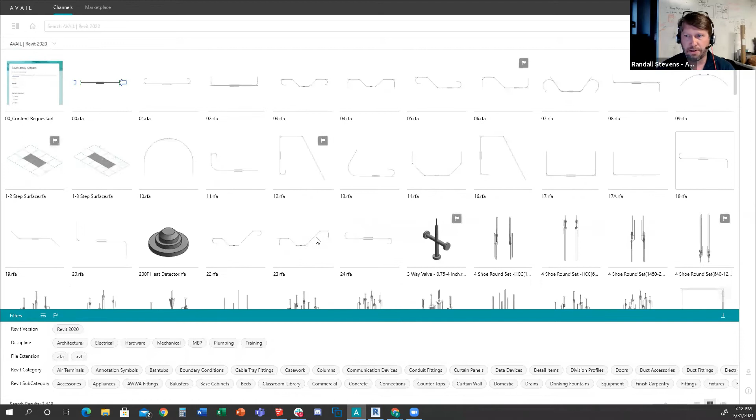So I'm going to show you the variety of content. I'll start with some Revit content here, so you can see this is a channel full of standard Revit standards library. If I look at the bottom left, there's almost 3,500 pieces of content.

The first thing I'll show you is if I select one of these, right click and say open the location, it's probably going to pop on my other screen over here. What you'll see is it just opened up Windows File Explorer and took me to where that piece of content is. You can see this lives on the network down in this folder hierarchy that I call file folder hell, that we all live in trying to find this kind of information.

So the first thing is, Avail, we would use the term flatten - it flattens out the availability of this. But you'll also notice down here at the bottom what we call the filters panel. You can open this filters panel, and Avail automatically has picked up a lot of metadata and information, displaying them in the form of what we call tags.

So searching, you'll notice there's a search bar across the top, making it very easy to type in what you're looking for. You can also use these tags in any combination. You'll notice this data is actually structured data, so you'll get things like Revit category, and I can see all the different Revit categories. If I choose casework, you'll see that Avail is searching and filtering down, showing me things that have been tagged with the word casework.

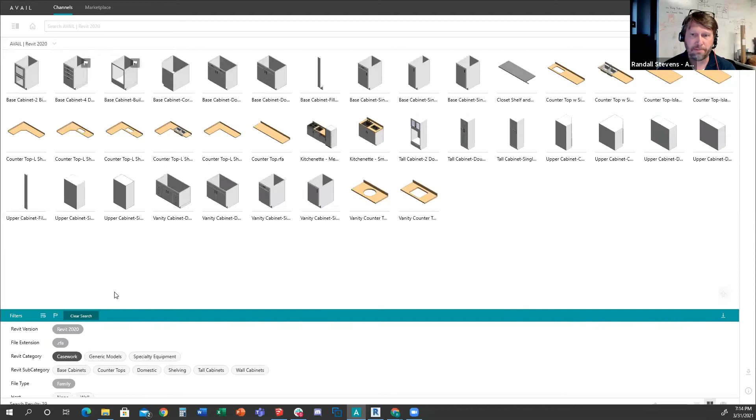I'm just holding down my control key and using my scroll wheel to change the scale of those thumbnails, just to show you. If I go over here to the right and open up what we call the preview panel, you'll see that you're able to get nice high resolution previews of things like this as well.

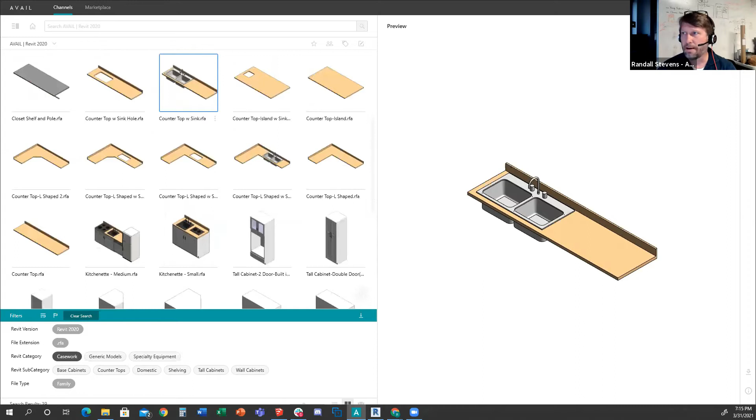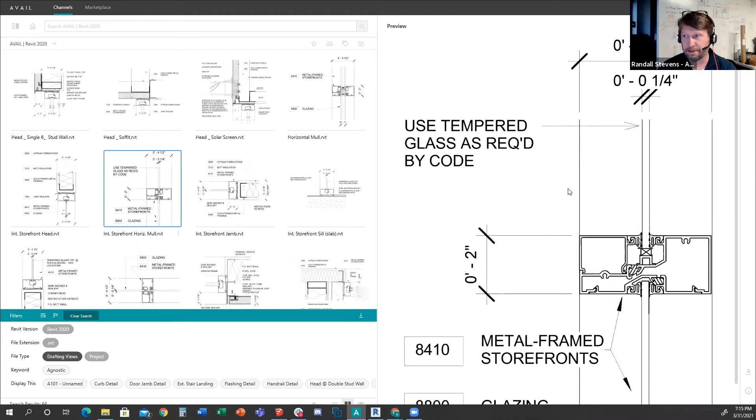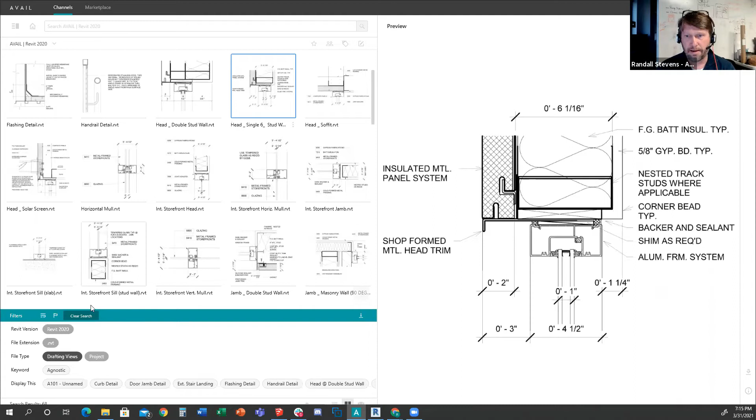But I'm not limited to things like families when talking about Revit content. We also support data that has to be stored in RVT files, things like drafting views and other content you may be tasked with organizing and using in your projects. The ability to display high enough resolution that you can see if it's the detail you want before committing to bringing it into your project is just one example of our heavy focus on the visual nature of this, making sure that when content gets into Avail, you can see it, which is very helpful in finding what you're looking for.

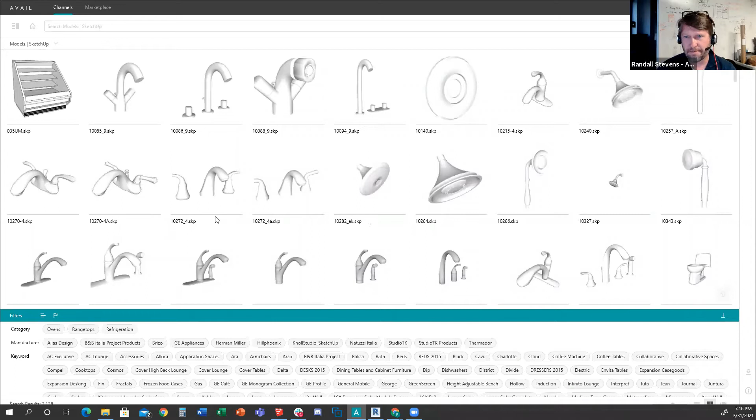Before I take a deeper dive and show you some specialized things we do with Revit, let me show you more breadth of the kinds of content you can organize here. I've got channels for other application-specific content, and I tend to use SketchUp as a simple example. You can see I've got a channel with a couple thousand pieces of SketchUp content, and again, this is all searchable with a simple text search or using filters to filter it down.

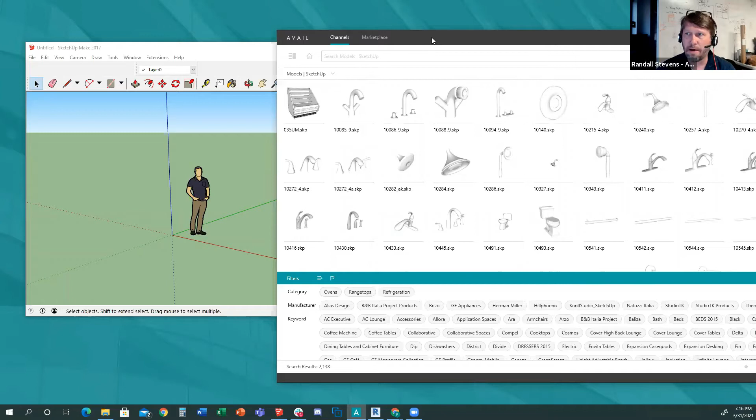What I'm going to do is bring up the SketchUp application and show you that getting content from Avail into an application is often just as easy as finding it, dragging, and dropping it. The reason this works, when I say Avail is content agnostic, is that it's a file type, SKP file extension, that the host application, SketchUp in this case, knows what to do with.

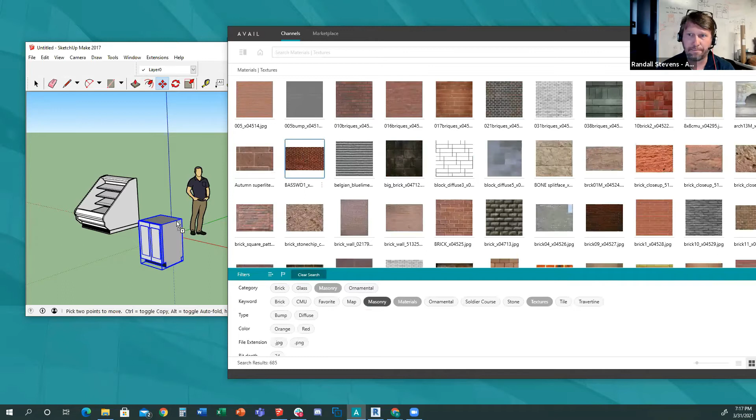If I go back to the home screen and look for my textures channel, I can find a channel full of textures, probably JPEGs and PNG files, and look for a masonry texture to quickly narrow down this content. If I want to bring that brick texture into SketchUp, you can see as I drag it over, that's not because Avail had to do anything special, it's just because SketchUp knows what to do with these file types.

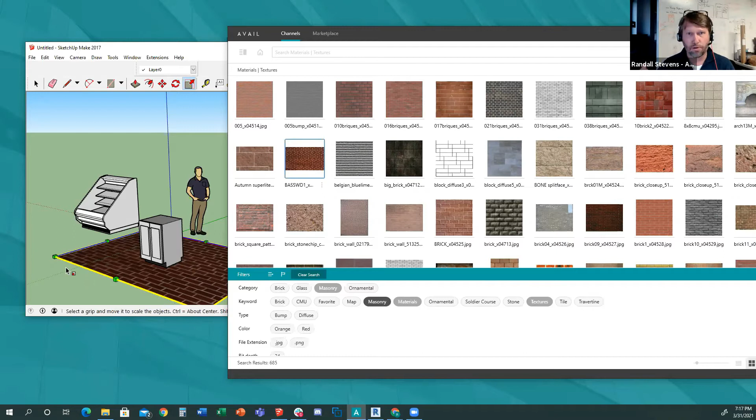So the general test is, if you can drag and drop it into the application from Windows File Explorer, you can also drag and drop it from Avail, which makes it very flexible. I could just as easily have photographs in here and be dragging those into PowerPoint or a Microsoft Word document, just as easily as these technical applications. I like to start with that to get you thinking more broadly about the variety of content that can be managed inside this application.

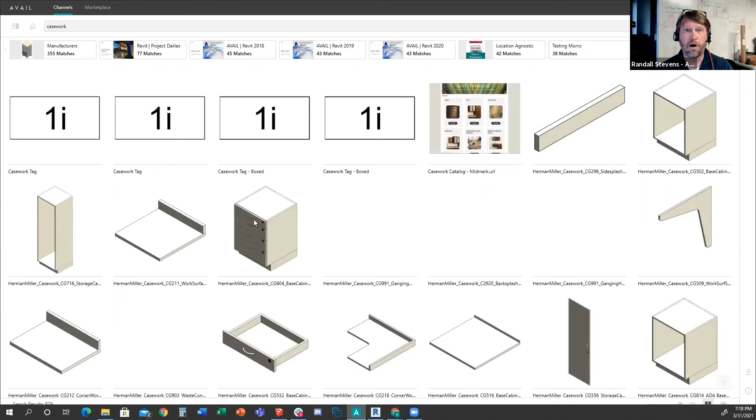If I go back to the home screen, I'll show you that you can also perform your searches from this home screen, and it's actually going to search across all of this content. For instance, if I search for casework, rather than being in that single channel, I can look across all of my information and content and get results back.

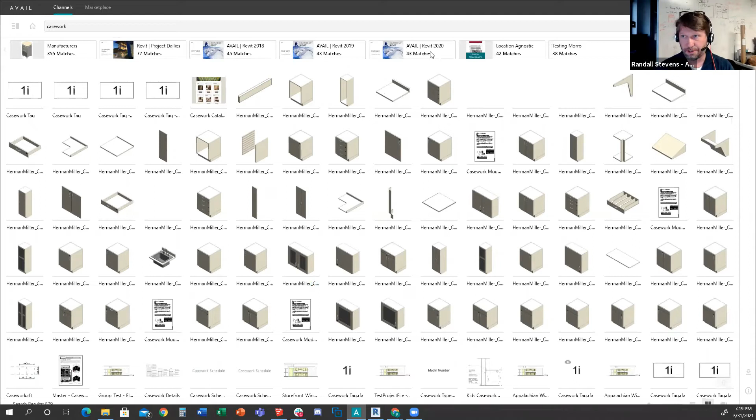What you'll notice in the Avail interface across the top is, maybe more importantly than bringing back content, which can be noisy depending on what you're searching for, we bring back the context where we found that. In this case, I can scroll across and see the different channels where I found this information. So if I knew I was looking for Revit 2020 casework, I can filter that with one click, or I may find out there's information in one of these other channels.

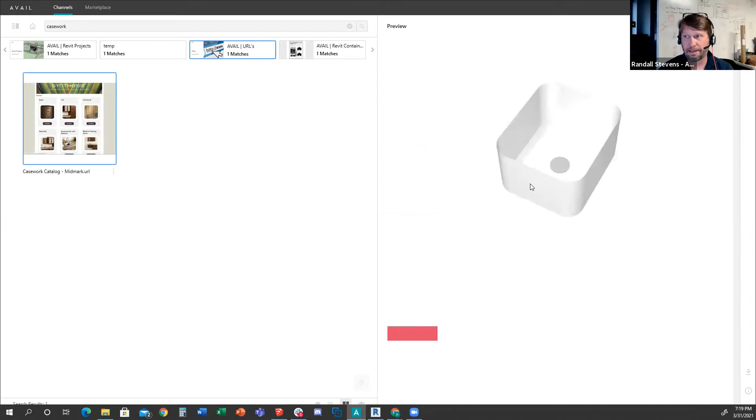Here's some URLs, a great example of the flexibility of what you can index and view. This is actually a URL to a manufacturer's website that's been organized in Avail. If I open the preview panel and touch the link to the URL, you'll see that Avail is actually rendering that website right inside the application, which makes it very flexible.

We've got a lot of customers. I've got a couple of channels here with lots of URLs I can show you. This feature was actually added from watching what our customers were doing with Avail, as they were starting to organize, especially interiors groups or people who have a lot of external references to information.

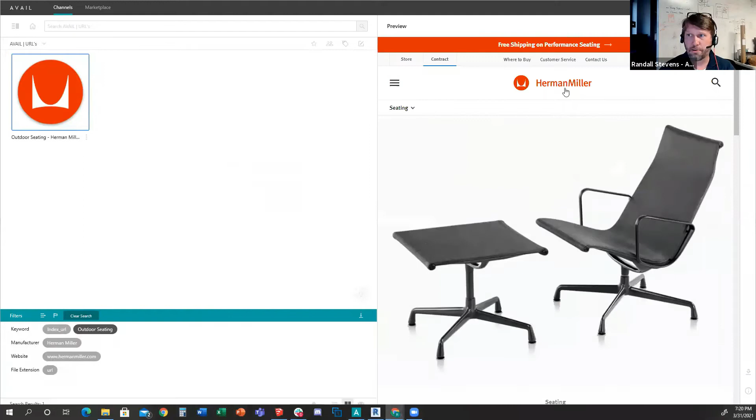You can see that you can tag these things, filter them down, and open up the preview panel with direct links. That can be an external website, an intranet site, or anywhere you've got information stored. If I double click on this, it's going to launch my web browser. I'll just show you—it launches Chrome and takes me to that website. So we have these built-in preview and viewing capabilities.

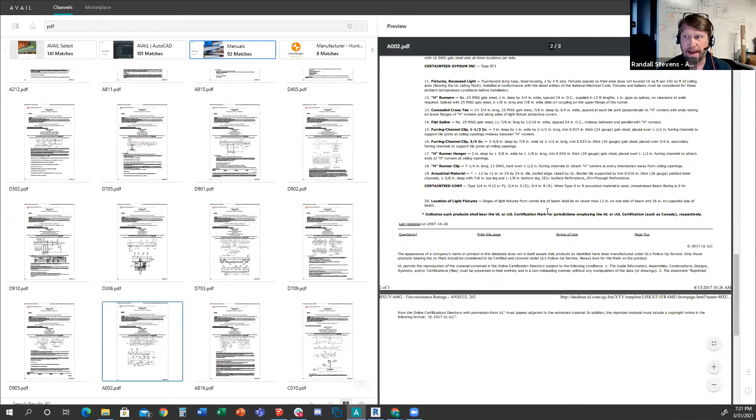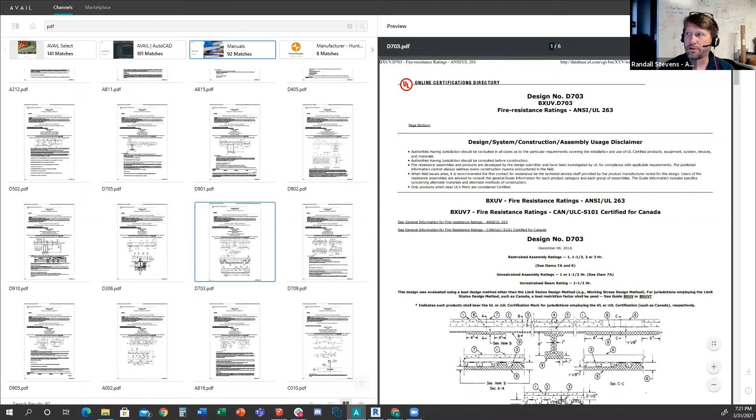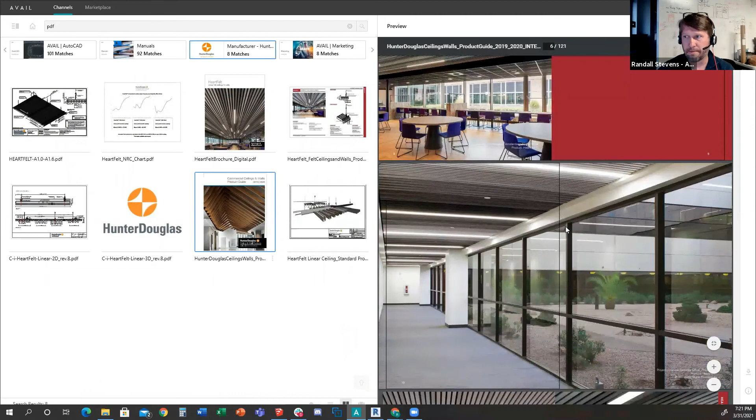Another useful document type is PDF documents. Here you can see lots of PDFs across different channels of information. If I select one and open the preview panel, you can preview it and quickly see if that's the document you need. If you're using Bluebeam as your primary PDF software, we're not trying to replace what Bluebeam does—we're trying to help you see if this is the information you need before you launch it into Bluebeam. If I had Bluebeam installed and double clicked that PDF, it would launch right into it, so it's very flexible. This makes it quick and easy to see if manufacturer's info and data is what you're looking for, and decide whether to pull information out or open it in another application.

So that's showing you just some of the breadth.

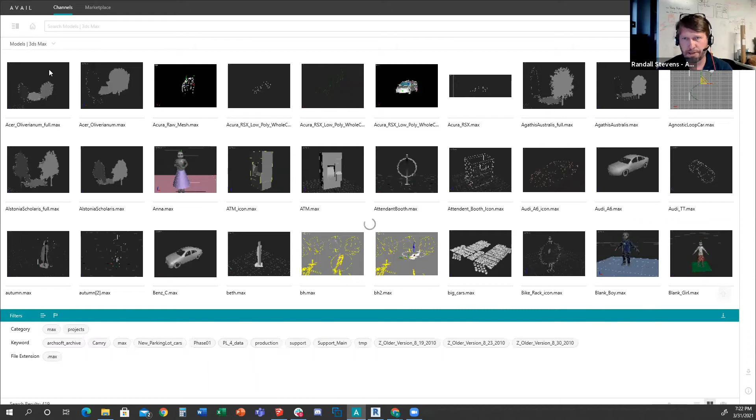Visualization assets—outside of Revit and DWG AutoCAD files—are probably the number 2 use case. You can see here I have 3ds Max files being managed in a channel, again with the ability to search and get back to find that information.

The other use case that's become quite popular is the ability to organize and manage photos. It doesn't even have to just be marketing photos—it could be construction photos or site photos that are project related. The ability to get those into this interface, and the preview panel comes in very handy to see those in high enough resolution.

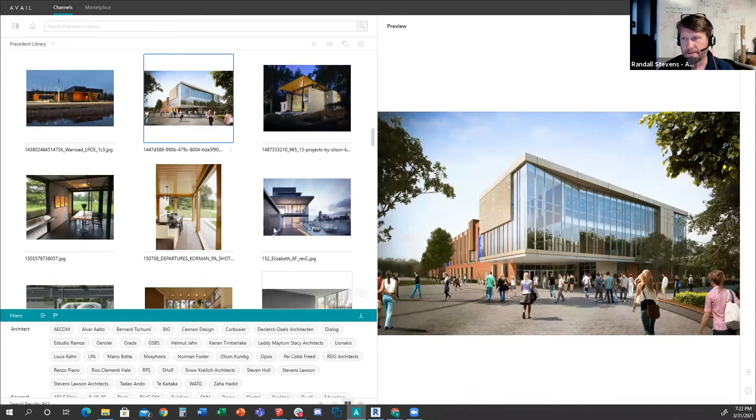We also introduced in this last release what we call a carousel viewer. If I close that, I can go into the carousel viewer, which lets me mouse over and thumb through, page through photos. So a lot of focus on the visuals.

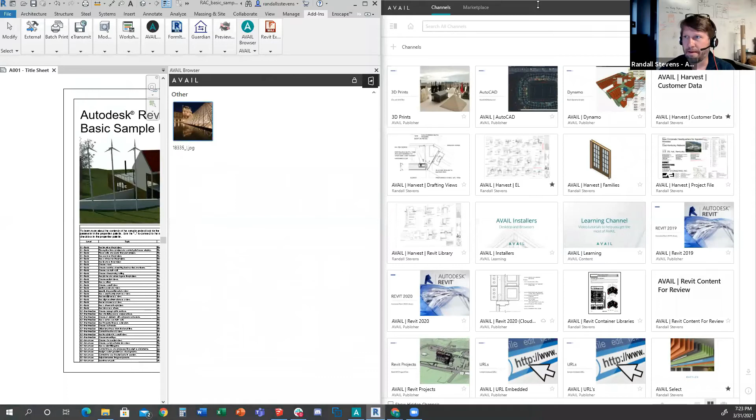Let me take a little bit deeper dive into Revit. What I'm going to do is dock the Avail desktop. Typically our customers would have 2 monitors sitting on their desk when using software like this. I'm going to put these side by side so you can understand the interaction between the pieces of software and how they interact.

I've just opened up Revit and the sample project file here. What you're seeing is what we call the Avail Browser, which is a plug-in browser for Revit. This browser lets us, in the context of your Revit project, see and pull information. I'm going to narrow this down a little bit to give me more room.

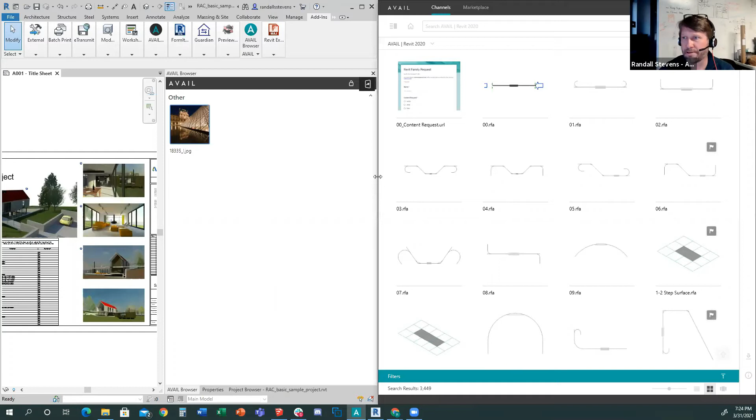This lets us bring in very specialized Revit content. I'm going to give you a couple of examples here. Let's just go to a 3D view to start.

So here I am in my desktop, and I'm going to show you that you actually can work without the desktop open. You can actually just work directly inside the browser if you want, but I'll use this as an example to start showing you how this can work.

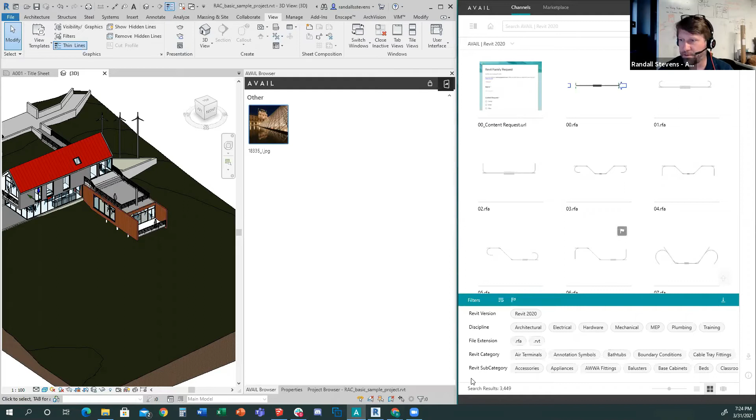What I'm going to do is search for that casework again, see our casework samples. I'll start with just some simple families and show you how the interaction works.

If I choose that family here in the desktop, what you're going to see in the active Revit project session is the Avail browser bring forward all of this secondary information, in this case all of the types available for that. I can either select a single type and load it into my project.

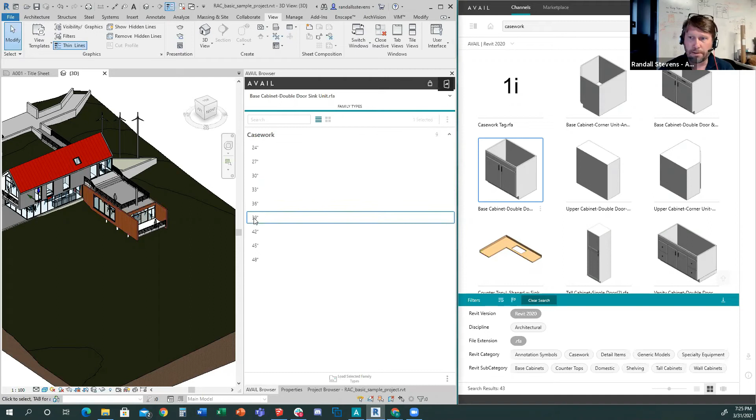We actually support multi-select, so I could load multiple types into the project. Or more often than not, your workflow can be to just drag and drop that over into the model, and it's going to bring that single type in and put me into placement mode. You'll notice there's a little check mark beside that single type that loaded.

And if I go over here to the project browser and go down to the families where that piece of casework lives, what you're going to see is that single type came in.

One of the things we've seen with our customers, especially using this for their Revit projects, is that customers are always fighting data bloat inside of their projects. Traditionally the mode of operation has been to try to stuff everything you might need for a project into a template and start the project up.

But what we've been seeing over the last few years is a move towards thinning those templates out, usually to just the graphic standards, and then using Avail to keep all of the information outside of the project until it's specifically needed. You can think of that as a very additive process to your project, as opposed to bringing in lots of data that you then are fighting.

We see it all the time, that as the project grows and the amount of data in it grows, you're fighting that project data bloat. So it's actually kind of antithetical to bulk load lots of this information into the project if I can just selectively bring it in as needed, keeping the data in your Revit project file thinned out.

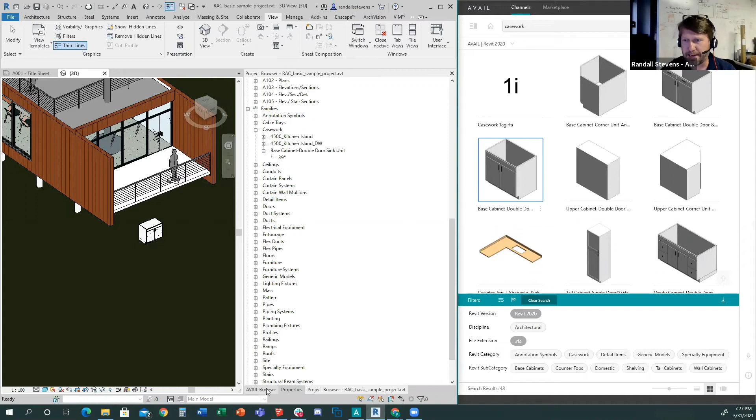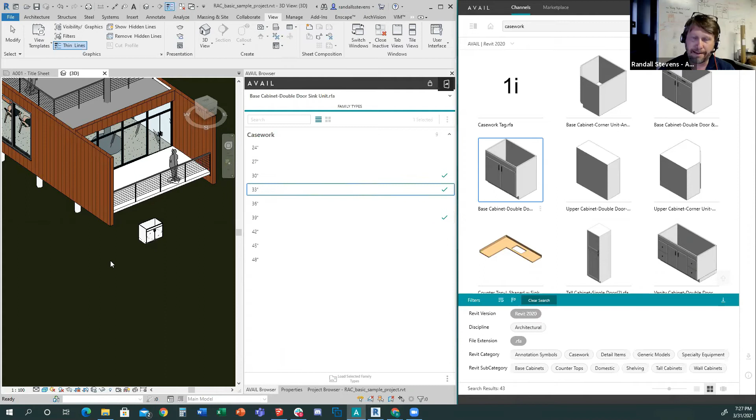So that's obviously a simple example. If I did want to load just a couple of other types in, I could just click, select those, and they're going to get loaded into the project without putting me in placement mode. Just a very quick workflow of finding and getting that information into your project.

What gets most people excited are things that aren't families, and I'm going to show you the kind of traditional support for this, and then a brand new feature we just introduced last week. But here you can see I've got RVT files.

There's a lot of your Revit information that aren't families - things like drafting views, system families, views, sheets, schedules. All of that kind of information ultimately has to be stored in an RVT file, and there's complexity to that.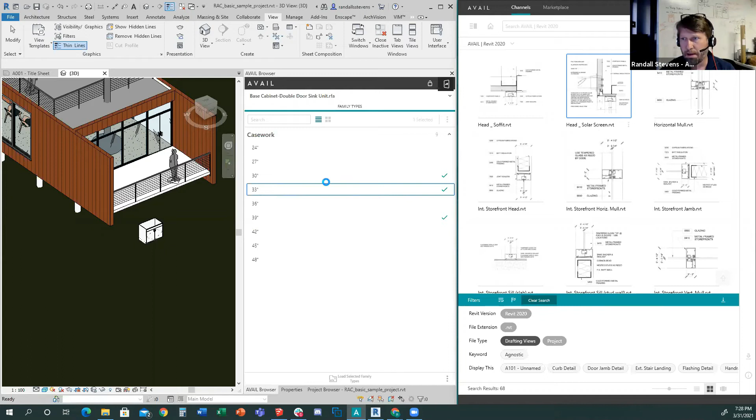But what I'm going to show you is that here I have these details in a library that are all searchable. If I select one of those, what you're going to see in the Avail browser is that this is an external RVT - so without opening that project, we're behind the scenes actually exposing that information.

You can see here that I get the preview, but I can also right click and do a full vector-based preview - so once I'm in the context of Revit, I can do that. I still have not brought this data into the active Revit project. So what I'm going to do is just go over here and create a new sheet to work on.

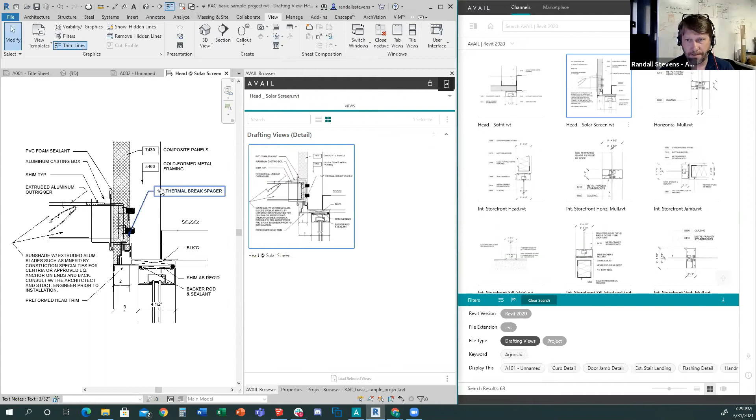Now I can actually just drag and drop that drafting view directly onto a sheet, if I want to. This is basically replacing a multi-step process that everybody's used over the years, which is a Revit project standards transfer from project A to project B. We've really simplified these interfaces, so you can see it loads it and puts me into placement mode all in one step.

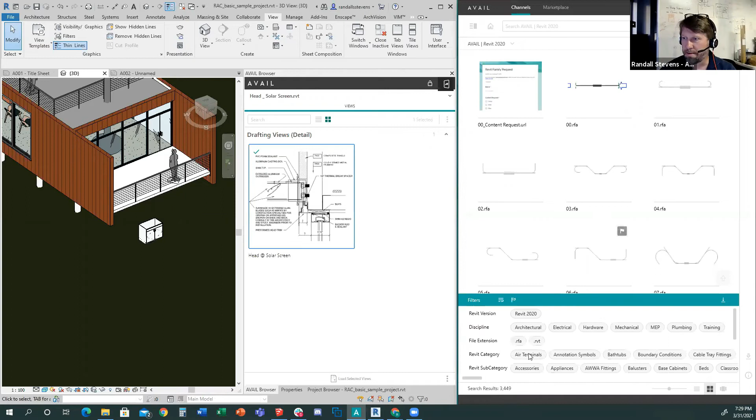Let me go back to my 3D view and show you the other kinds of content types that you're forced to manage this way, like system families, which have to be stored in an RVT file. So what you're going to see here is I have some system families in a single RVT file, what we call container libraries.

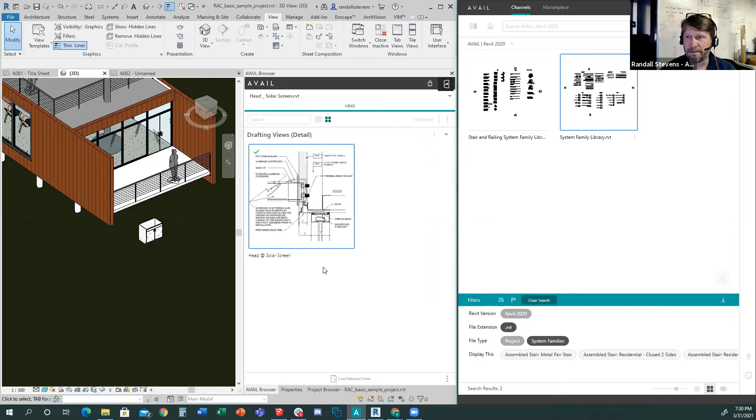So what you're going to see is that Avail is opening that data up. You can see here that I have all of these system families, and they're actually searchable in here. So if I knew there was like a veneer, well, let's find maybe brick. I'm looking for a wall type, find the wall type, and again I can just drag and drop and start modeling instantly from this interface.

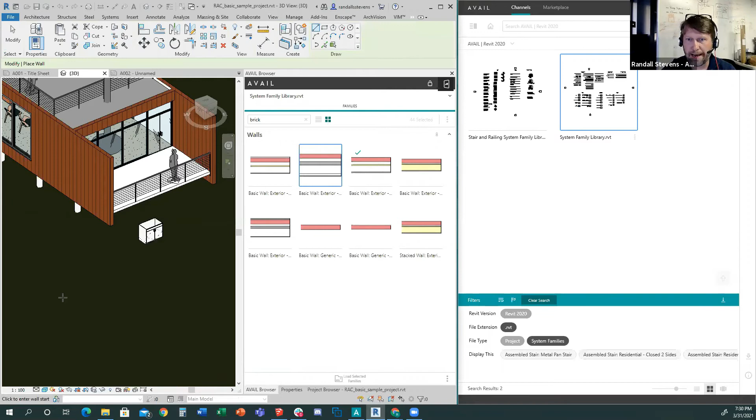So this has been the default kind of support that we've had for how to manage this, and it's obviously been a huge help to all of our customers who were fighting with how to store this information and make it findable and usable by their end users. What I'm going to show you is actually a brand new feature.

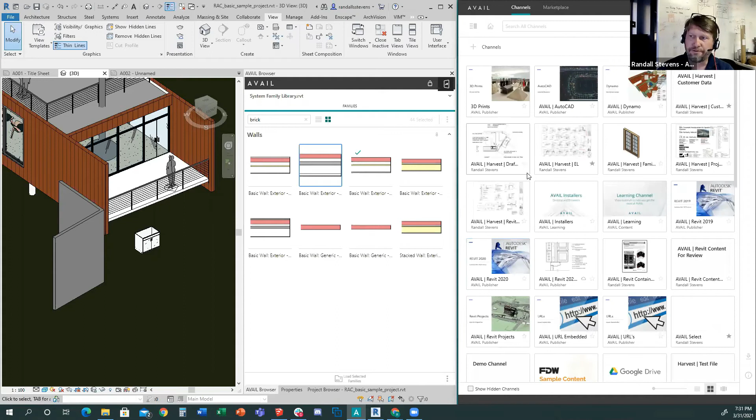I'm going to go out to a different channel. We released a new feature we call Harvest. So I'm going to go to a different channel here that's just got some drafting views in it. Let me go full screen with the desktop for a second. These are all details that are actually being stored in a single RVT container file behind the scenes. What this allows you to do is it completely frees you up in the interface, because these are taggable, searchable, findable.

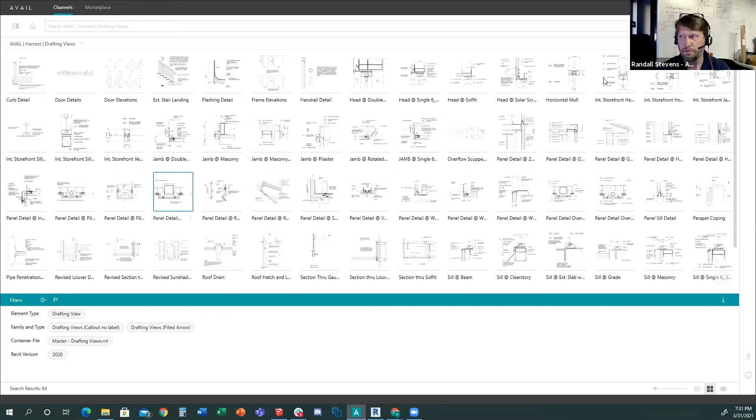If I open up my preview panel, you'll see that we get high resolution previews. All of this was automatically generated by our Harvest tool, pre-processing on all of these files. But this makes all of this searchable, findable, and then ultimately, in the context of Revit, immediately available to be brought into my project.

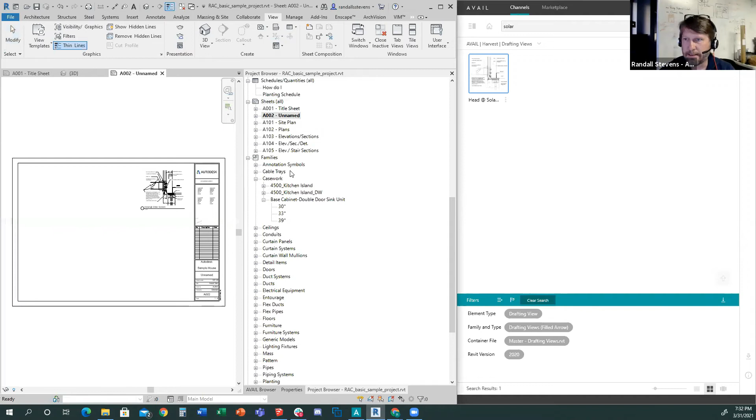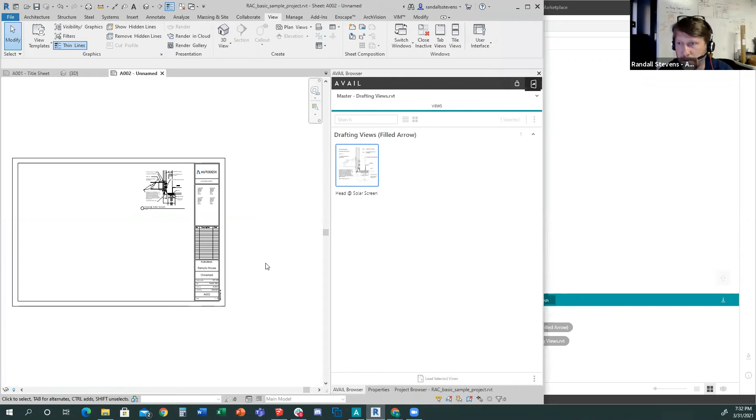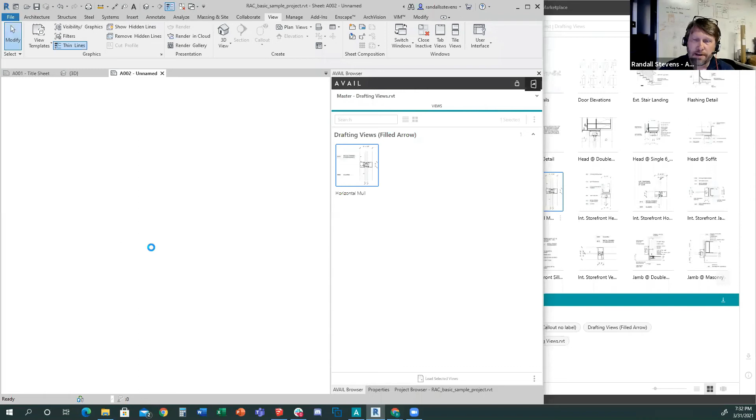So if I go back to that sheet that I had created and now open the browser, you'll see that I can actually drag and drop this directly onto a sheet in this project. Come back here—oh, I think I was in placement mode. Let me get that loaded. So this is, there we go. Oh, I think I'd loaded the same object, that was my problem. Let's get a different one—there we go, I was trying to load the same detail.

So it makes it that easy. What I'm going to show you is that this has actually even simplified this further. If I close my browser, even inside of Revit, I can actually just drag and drop these directly from the desktop application over into Revit, directly onto a sheet.

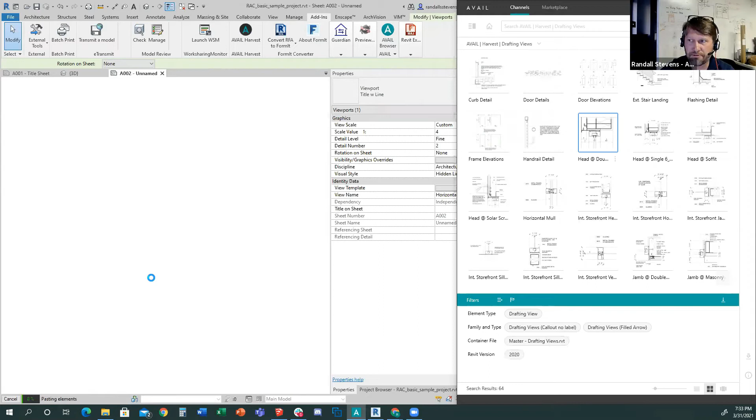So we think this is really going to simplify what it means for the end users. Not only for the BIM managers and the people responsible for managing the content, because you can manage all of this in a single container file, but it's really helpful for the end users because it makes it very easy to search, and they don't have that complexity of having to worry about whether it's inside an RVT file or a family file, whether they can drag and drop it, or what the steps are to get this into the project.

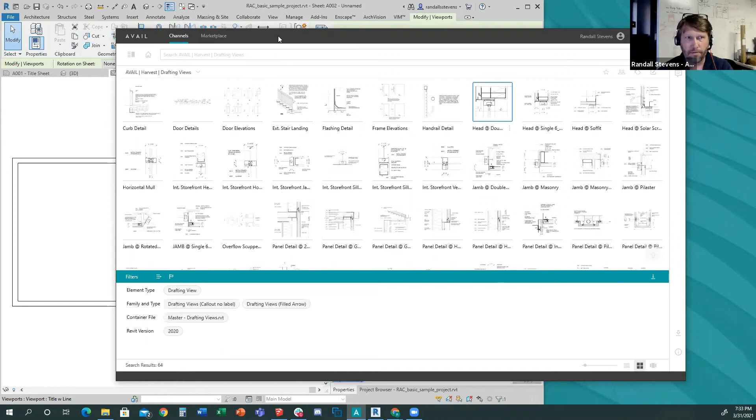So if you take a step back from our philosophy of what we've been trying to do, this is another example of taking location out of the equation. The end user shouldn't have to worry where that content is. They should just be worried about: can I find it in the library? Do I have access to it? And if I do, can I get it into the project?

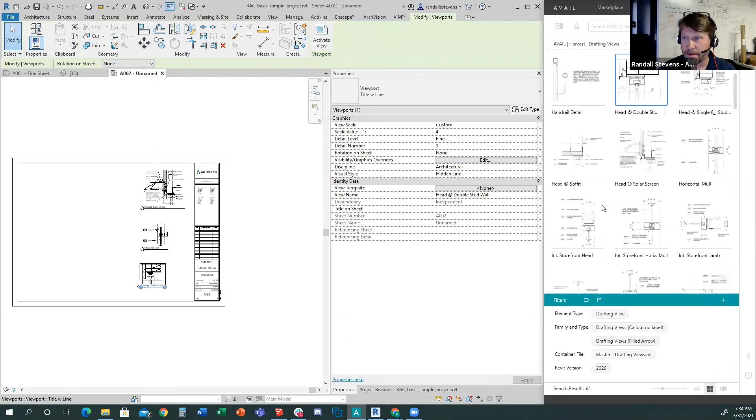Let me show you real quickly that this will work standalone, and then I'll open this up for questions. Watch what happens if I close this desktop application. I'll go full screen now inside of Revit, but this browser now goes into what we call standalone mode.

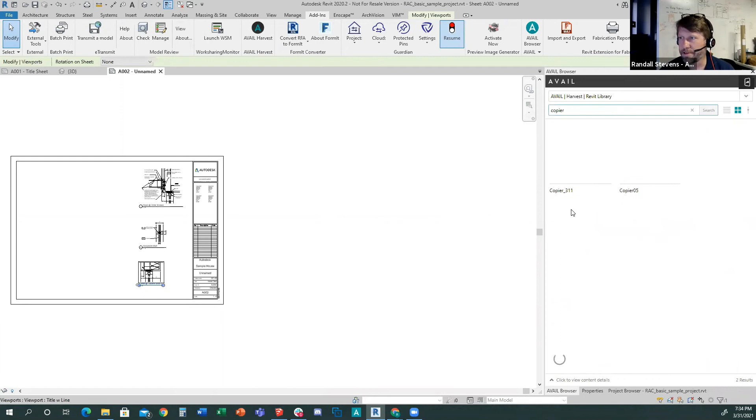I still have the ability to see all of those channels that I had access to information in. This is all still searchable. Let's see what I've got in here. I'll just look for copier. So there's copiers that I have access to. If I'm in my project and working, I can just drag and drop this directly into my model, and it will display if there are any types available for me to choose from.

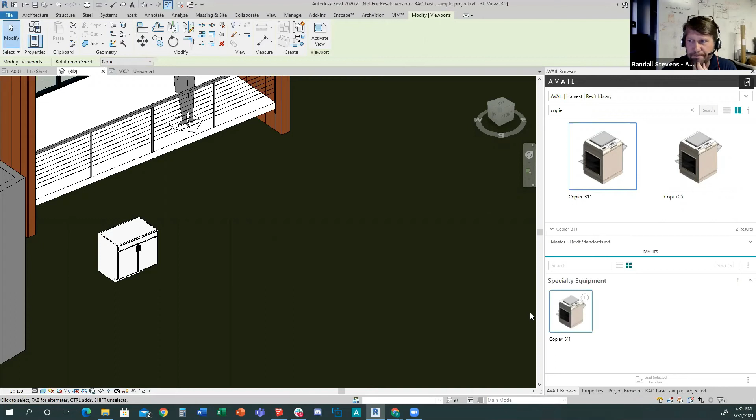Let's see what questions have come in while I'm doing that. Feel free to type in if you've got a question. Looks like the first question was, is it possible to negate the filter tag, say if you want to find miscellaneous content by excluding the content that is tagged? That's a good question, we're asked that actually quite often.

Not currently. It makes for a complicated UI and user experience. There probably are some ways we could do it so it wouldn't be confusing, but the real challenge becomes Boolean searches. The mathematics and the way you do Boolean searches, this and that, or this or that, get very complicated. They're so complicated that even very bright people get confused when you finally put it in front of them. So it's one of the reasons we've stuck to what we call a narrowing search strategy: start your journey of what you're looking for, and then we keep narrowing and asking more questions or providing more data to continue narrowing that out, as opposed to trying to do complicated Boolean operations.

That being said, I think there probably are some ways, maybe just for managers or more sophisticated users, to do inversions of the selection sets and those types of things. But that's something we'll continue to look at. Good question though, Warren.

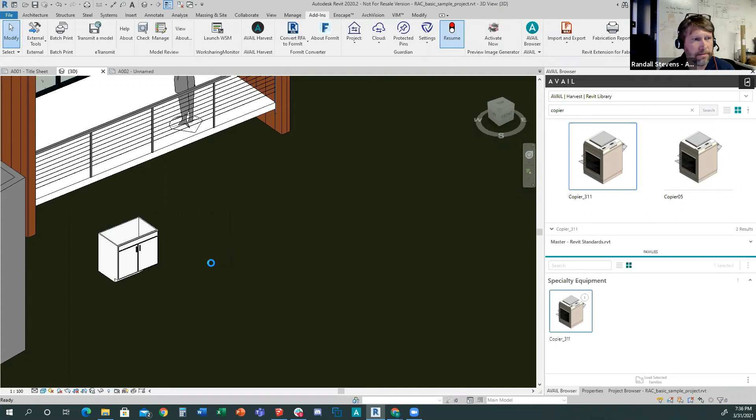Any other questions? We're happy to open that up. If somebody wanted to turn their audio on, we can unmute you as well. Warren asked another question about whether you can add tags, which brings up a couple of other points.

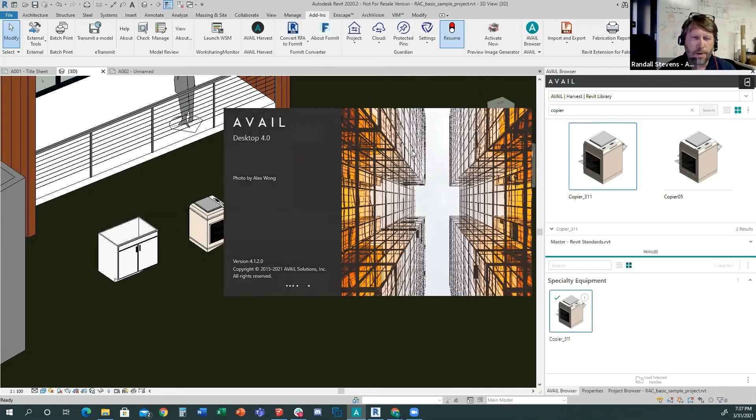Yes, the answer is you can always manually add tags. For Revit we have what we call the Revit tag generator. Actually most of the information you saw in the context of Revit was parameter data coming out of the Revit files themselves and auto-populating. We also pick up metadata off of the file system, so folders and folder names get brought in as information.

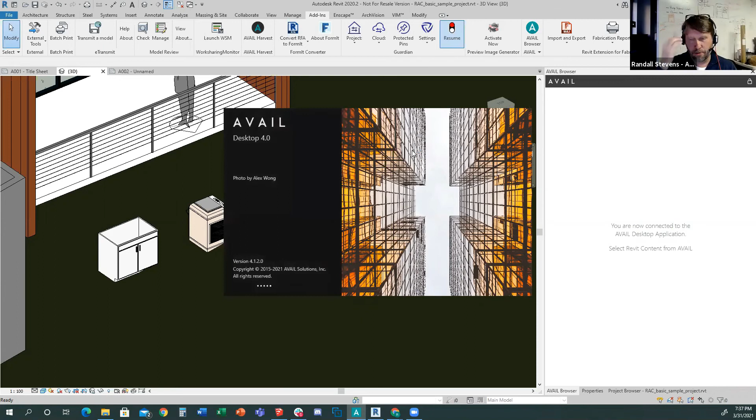As soon as I get the desktop open back here, I'll show you, you can also manually add tags to add more information. We actually have a new feature in testing right now that will be released in the coming weeks: the ability to import and export from Excel and Google Sheets. So you can take large libraries of this information, spit it out into an Excel or Google sheet, do some tag management, and then shove it right back into the system. Lots of flexibility on that front.

Let me go full screen here and show you. If I went into one of these channels and wanted to manually add a tag, I'll just select it, right click, say I'm going to add a tag, and add my name to that. It's that easy. You save the changes, and as soon as that's finished, if I type in Randall, it's now searchable by that. You can see I've demoed that on several pieces. So yes, you can manually add tags.

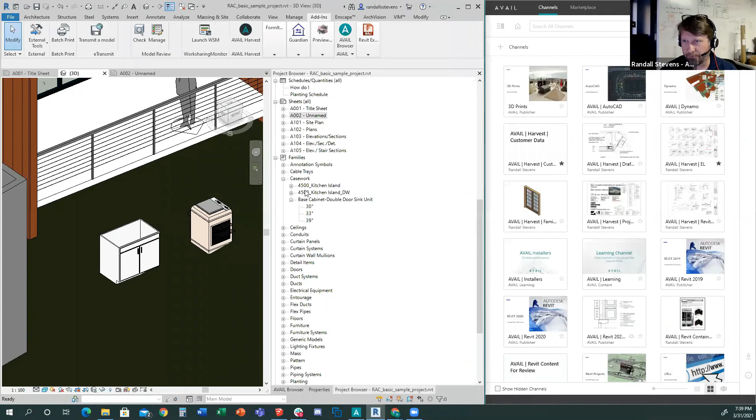The next question was, can we drag and drop schedules? And the answer is yes. Let me actually, I kind of stopped on how cool this new harvest is, but it's pretty exciting to see that you can do this with schedules. So I'm going to go back to my Revit project and open up that sheet again.

So I'm going to go back. I've got some content that I've put in using Harvest, and you'll see here that I've got system families, but I've also got drafting views, legends, schedules. So here are a bunch of schedules.

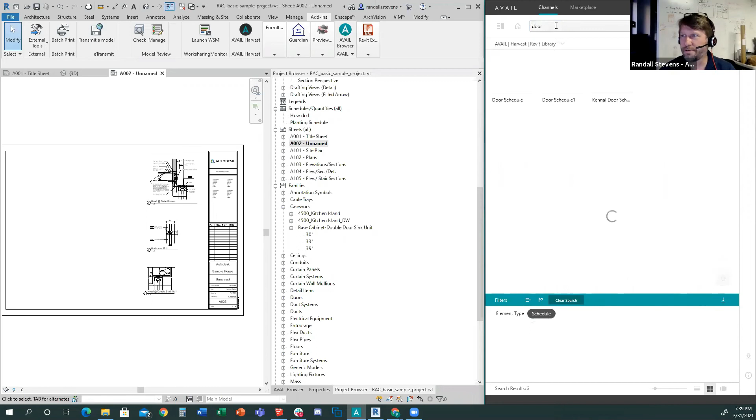If I were looking for, say, a door schedule, I can search for it, and I can drag and drop this directly onto the project, directly onto a sheet from my library. So I'm just going to drag this over here. What Avail's going to do is bring in that schedule, load it, and populate it with this project's information.

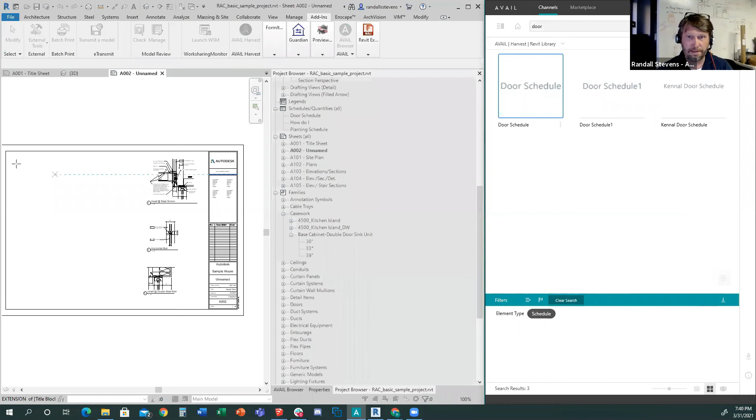That easily. A lot of customers are beginning to do this, not only building an overall firm-wide library of Revit content, but getting down to using channels to organize data for specific project types, or even down to a specific client. If you've got a client with certain requirements or standards for how they want their information built, you can organize that in a channel of Avail and use it for that project specifically to get your work done.

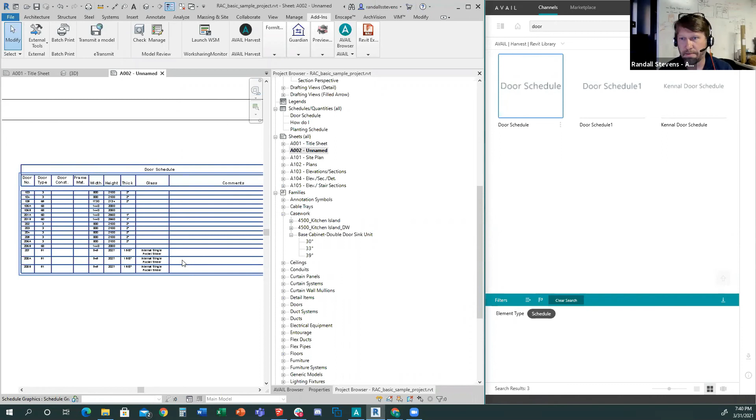So schedules, legends can be brought over. Basically any data you could normally do with a Revit project standards transfer, we're trying to support. There's still a couple of things though - view templates, which you asked about, is one we aren't currently supporting, but we're working on it. We're going to add that hopefully here shortly.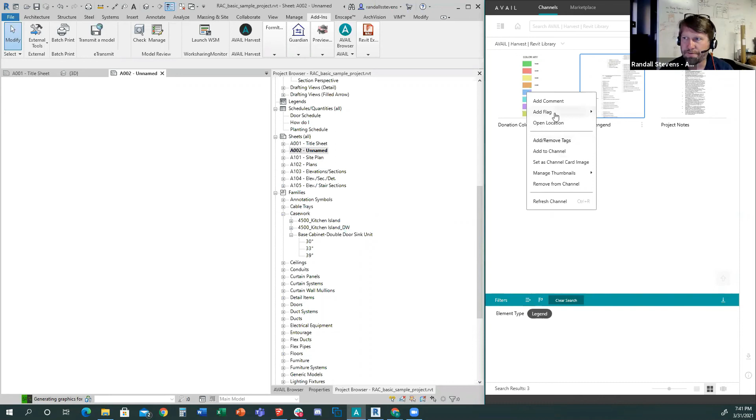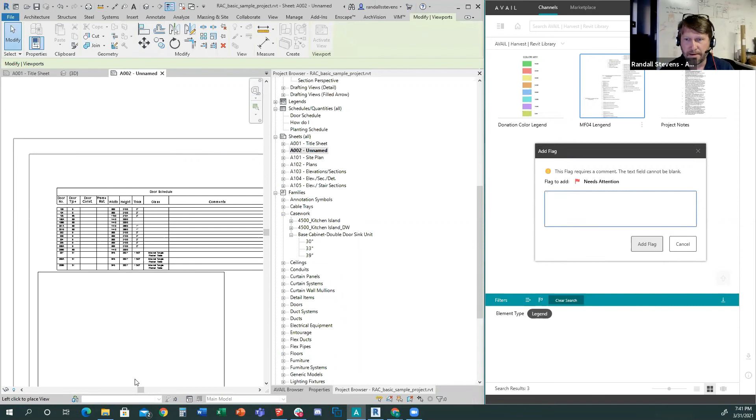The other thing you can do inside of Avail, while that's loading, is have your users flag content. Just by clicking on it, I can say a piece of content needs attention, and it pops up a box asking what's wrong with it. It's a great break-fix kind of workflow - somebody sees something wrong and can flag it, bringing it to the attention of the library manager or BIM managers across projects. It won't let me add that flag without saying what's wrong, so I'll do that and it gets flagged.

These become a great content roadmap. It actually starts to tell you what you need to work on next, as far as what's important that your users, your customers, are having trouble finding.

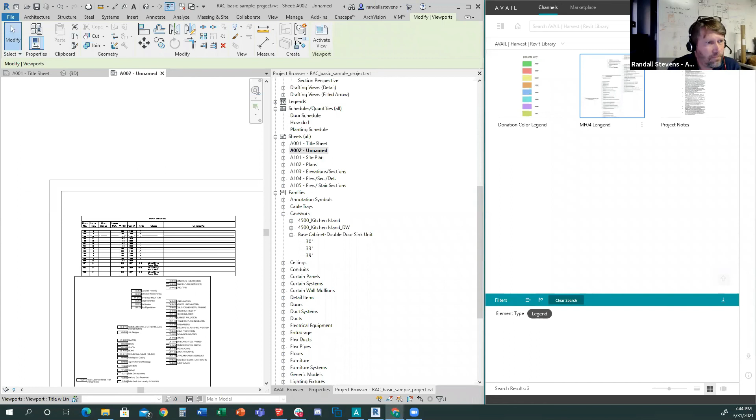Next question: if you update content, are you notified? If you drop a newer RFA, will it say do you want to overwrite? The answer is yes. If you're bringing in a piece of content that already exists in your project, Revit will kick in and ask you what you want to do, overwrite it or bring it in. So we're not doing anything to override what Revit would automatically check for.

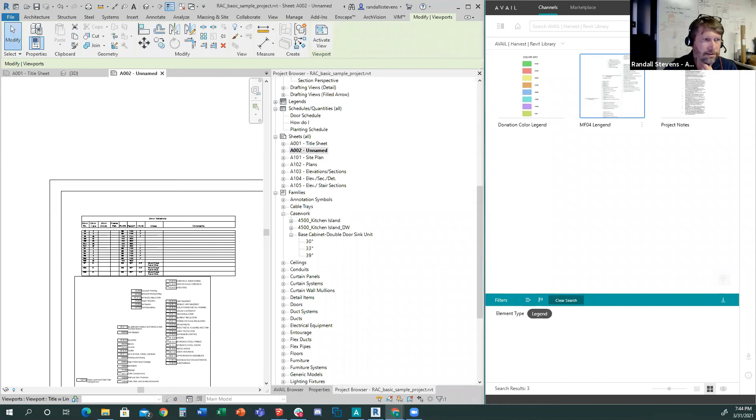Another question was, can you subscribe to a flag? Can a BIM manager get notified? Yes and no. It's going to show up in your analytics, and you can have the analytics send you emails. The limitation is that it'll usually only give you a digest, like once a day is the frequency. It won't send it to you immediately.

We've tried to avoid a whole lot of noise coming out of Avail. If there was lots of messaging coming all the time, you'd just start ignoring it. So we're working on new notification capabilities, so you'd be able to do things like, if something gets flagged, notify me immediately, or give me a digest once a day or once a week. The analytics already does some of that, so you can ask for a weekly or daily digest. We're going to be working on new notification capabilities that get more granular, so we can send those out.

What I didn't show you is that every time you create a channel, by default you are the only person who sees that channel. So if I go into this Revit channel, and I'm the owner with publishing and editing rights, I can go to shared users. You can see this channel has been shared, in this case with everyone in the company, basically everyone in your plan. And you can decide whether they have editing privileges or not.

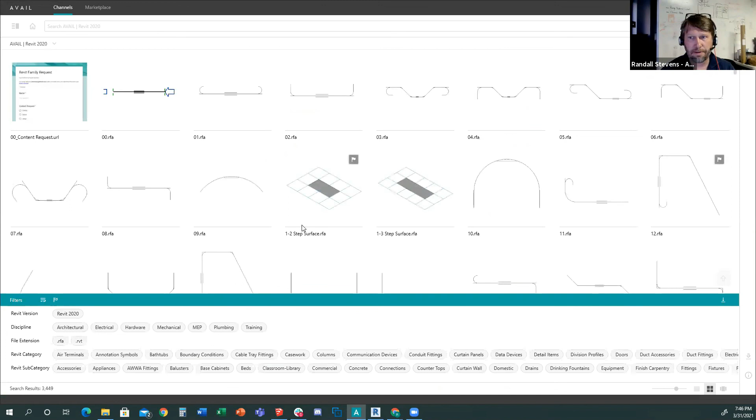There's a couple of roles. By default, people are what we call consumers, and then people can become publishers, which means they can create these channels and curate content. Every time somebody creates a channel, they own it, and they have to decide who else to elevate privileges to so they can also work on that channel. So there's quite a bit of flexibility from a command and control standpoint about what you're able to do.

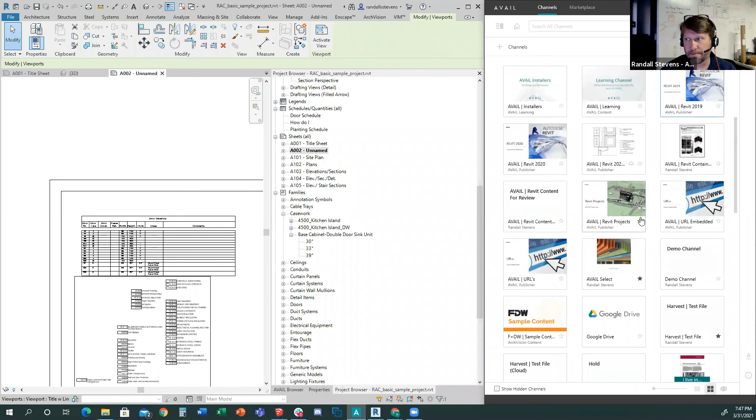They'll take, for example, their 2021 library, do a bulk upgrade, copy the content over, and then push that into Avail and have it available. Avail will also let you upgrade on the fly.

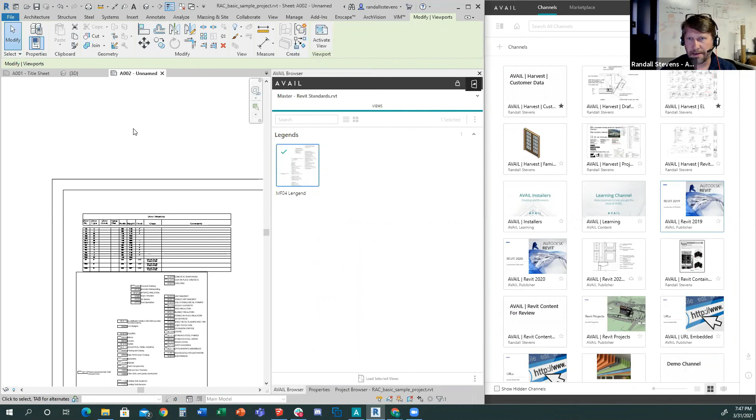So here I am in Revit 2020. If I had a piece of content that was in 2019, let me give you a quick example and show you what it does. When I touch that piece of content, it's just going to ask me if I want to do an on-the-fly upgrade. That quickly, it'll upgrade that piece of content on the fly and let you bring it in. We could also do that automatically.

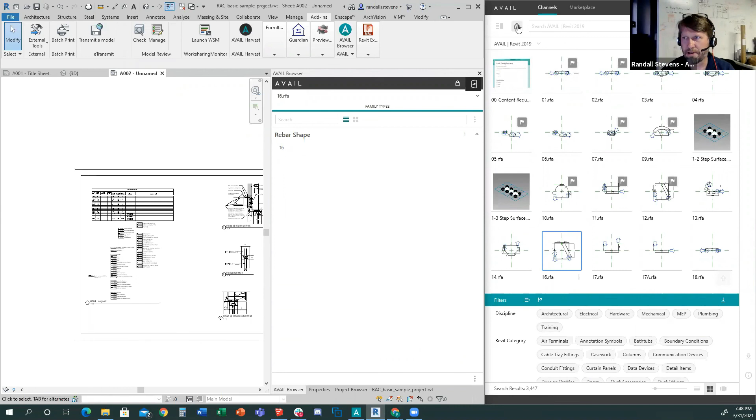Because sometimes things are stored in RVT files, and those files could be large, we tend to not make that an automated thing and let the user decide if they want to perform the upgrade. It's usually, like I just showed, a couple of seconds.

We do also have a host in cloud feature. I'm going to show you another channel here where I have content that's now hosted in the cloud, so you can decide if you want to publish information into a cloud hosted location.

If I were looking for a door, let me filter down to doors. You'll notice that it looks like all those have been downloaded. Let me find one that hasn't. Go to my casework. You can see the little download icon that shows up, and all I have to do is click to download and watch what happens in the browser.

As soon as that's downloaded, it's immediately available to be brought into the project. And what you're not seeing behind the scenes, we handle the type catalog files automatically, all that kind of information.

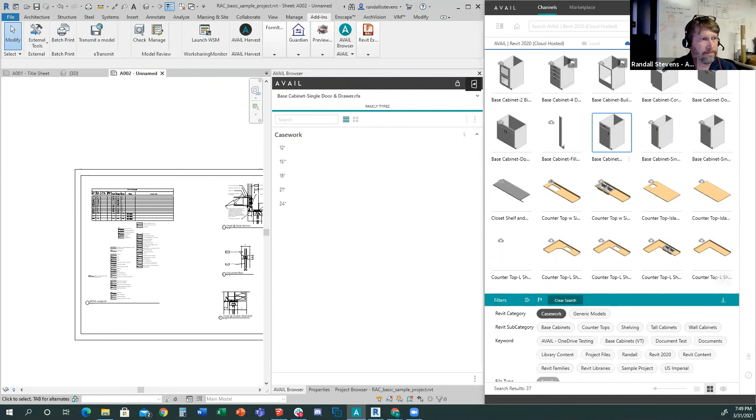All right. Good questions, Tim. Thanks for throwing those out. Looks like I missed a couple earlier. Do materials all map automatically?

So the answer is yes, because we're not moving the files around. Unless you're doing hosting in cloud, now you're actually moving the file around, but otherwise the content's staying wherever it was that you have it stored. So the mappings all stay aligned, which is a big problem.

I'm glad you asked that question, Mark. There's some other strategies that we're actually working on for how to help with the hosting cloud problem, or cloud hosting of content in general, because for any application that has specific map paths, if the application wants to store that and you have very explicit places those maps need to be, that presents a challenge. So we're working on some new strategies to help along that front.

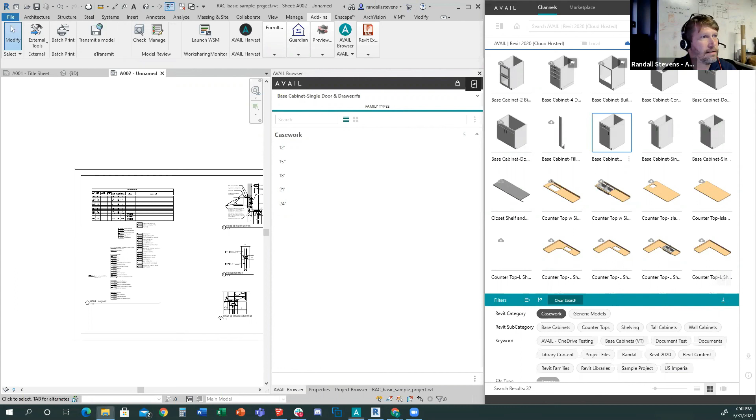And can we see samples in realistic? I assume you mean realistic mode. Not in Avail. We're not doing any rendering per se in the Avail software, but of course in Revit I could go into realistic mode. Not sure if that's what you were asking, Mark, or not.

All right, Tim, another question: view templates, color schemes. Yeah, we haven't added support for view templates yet, but that's with our new Harvest capability, that's one we're working on. And somebody's asked about materials, which is always a question. We're going to try to tackle both view templates and materials next.

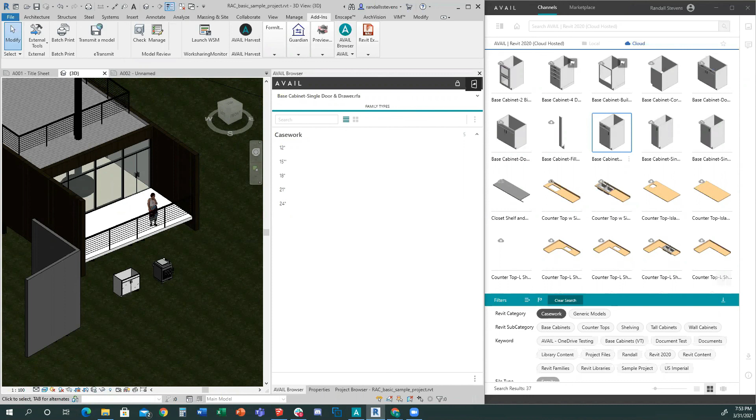Thanks, and we're doing, I'll use that to kind of... I'm a little bit dangerous, I'm on the product side, so I'm always working on the next gen of things. One of the things we're excitedly working on right now is actually a mobile strategy, so being able to see all of this kind of information on mobile devices. We think it's going to be exciting new opportunities, and it fits very well with our usage model: once you begin to get your information organized and managed in here, our goal is to make it accessible wherever you are, whenever you need to see it. So we're hard at work on that right now. Thanks for that question, Tim.